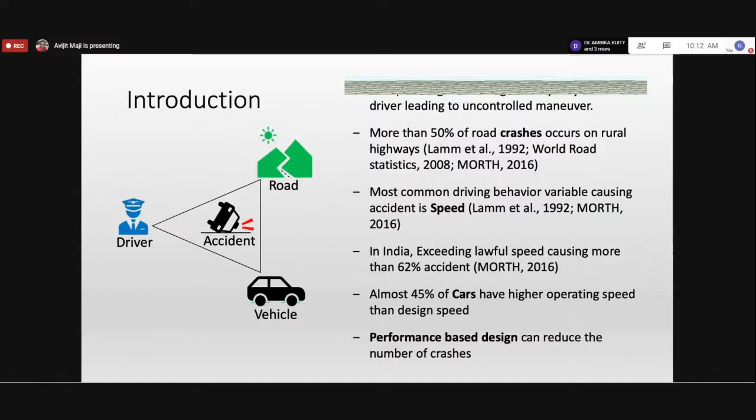Now, what do we mean by this product - what does it entail, what are the details? We are looking into the product, which is the roadway. The roadway has certain specifications, one of which is the design speed. Based on the design speed, we develop the product which has horizontal alignment and vertical alignment or vertical profile.

These two elements are developed based on the sight distances we want to design, and the sight distance is again considered from the design speed. As we look into this, there is a third element in the design, which is the cross sections.

When we are designing all these things and looking into safety and performance, we definitely need to understand the sight distance, and particularly, as I said, two-lane highways are critical. So one of the sight distances which is critical for two-lane highways is the overtaking sight distance.

In this presentation, we'll be focusing on that. So the main focus of this presentation is, first, the horizontal alignment - even though vertical alignment does affect safety, horizontal has more effect than vertical alignment, I'll come to those things as I present - and the other part is the overtaking sight distance we want to look into.

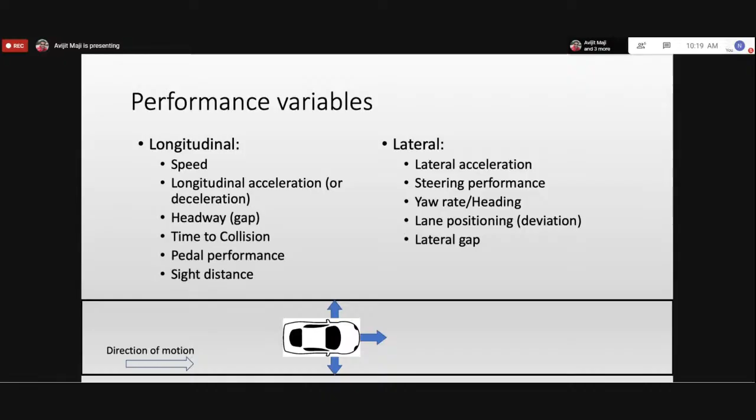Now, to collect these parameters, we need data. There are many ways of collecting it, and many of you are familiar with these various methods. One could be a speed radar gun, where someone stands beside the road and collects the speed of the approaching vehicle. In this method you can only collect the speed of the vehicle, which is one of the longitudinal performance parameters.

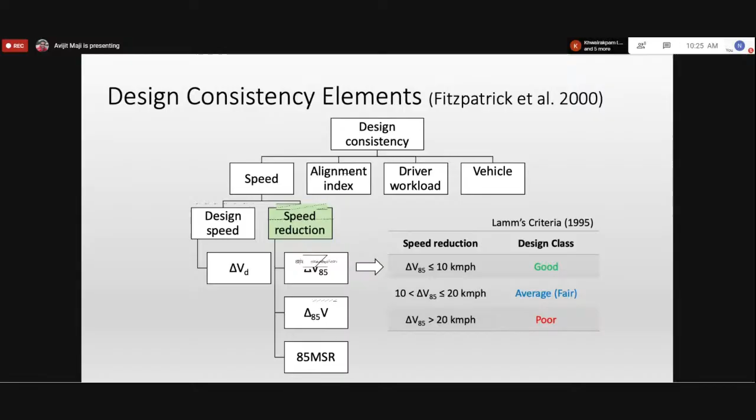In the first case, del V85, we have already fixed two locations, and we are just observing the 85th percentile speed at those two locations and deducting that. In our two-lane highway, the two critical locations are the preceding tangent length and the curve. We mainly check at the center of the curve and about 50 to 100 meters ahead of the curve in the tangent.

In the second case, instead of just taking the 85th percentile speed at both locations, we actually track the vehicle which passes through the first location in the tangent and the second location at the center of the curve. We look into the difference in speed for that particular vehicle, and check the 85th percentile for all the vehicles passing through.

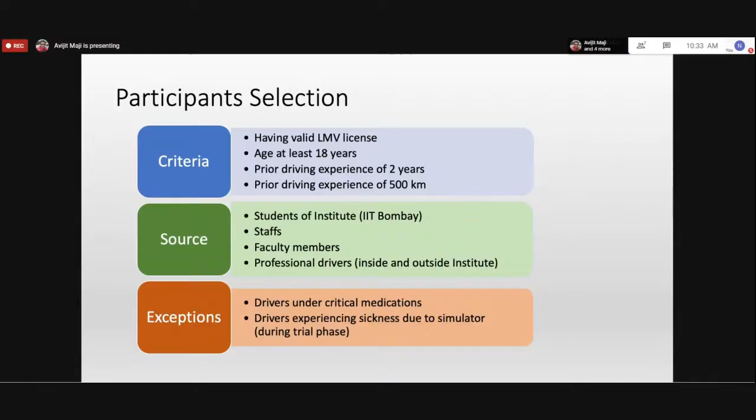And this study was conducted in the driving simulator. The driving simulator has its own drawback. There could be an issue of driving sickness. So we have to exclude them.

Now, before we start the experiment in the driving simulator, we need to have a pre-experiment session where we need to explain everything to the driver, collect certain demographic and experience data from the driver, understand their health condition, and then give them some time to get familiar with the simulator. And once all these things are done, then we get into the final test.

When we do the final test and collect the data in the driving simulator, we need to extract it. The driving simulator has the capability of collecting data at the rate of 120 hertz. If we have that amount of data, we need to apply a certain method or technique to use the data which we want. For our case, we kept it very simple. We just took the average of the speed and all the variables we are collecting over a 5-meter segment, so that we can reduce the number of data points in our analysis.

Once we collected all this data and tried to understand the performance measure, in this case the performance measure was the operating speed, particularly the reduction in the operating speed. In that reduction, we want to see the influence of the road geometry, which is represented by radius, preceding tangent length, curve length, gradient, super elevation, extra widening, and shoulder width.

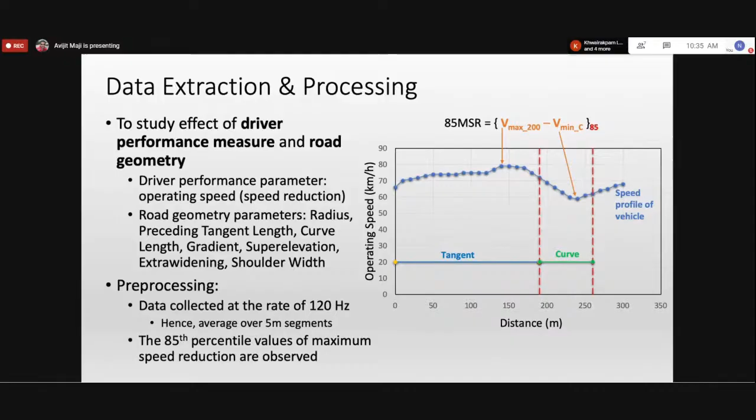As the radius increases and becomes infinite, which is a tangent, you would see a very comfortable, stable speed. But when the radius is reducing and coming to a very tight or sharp curve, you'll see that in the tangent the vehicle was traveling at a higher speed, and as they enter the curve, they have to reduce the speed. So that is what it is indicating.

Then the other parameter, PTL, which is the preceding tangent length, indicates that as the tangent length increases, the speed change is going to increase. If you have a longer tangent, people are comfortable, they will try to reach their desired speed, and followed by the curve, they need to reduce again. But if you have a shorter tangent, the driver might think another curve is coming, and they might not even reach the desired speed comfortably before they start reducing the speed for the upcoming curve.

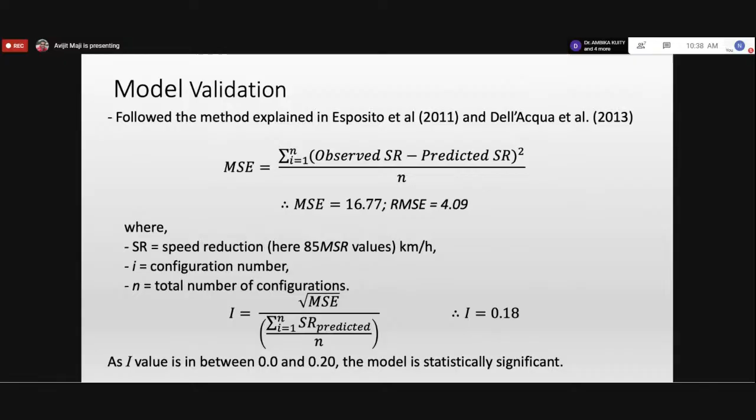Now, we had two parameters, and we need to see how sensitive they are. So we looked into the sensitivity of the parameters and found out the radius is sensitive compared to the preceding tangent length, particularly if it differs a lot from the mean value which we had considered in this case. So we need to be careful in the design when we are using a particular radius.

So further, what is the implication of this on safety? We looked into how we can actually use it. We looked into the various percentiles of the distribution of the speed reduction, and we categorized anything above 85% as poor design, and anything below 50% as good. With that, we set a limit of 20 km/h for good design, 20 to 35 for fair, and above 35 is poor. So if we look at the speed reduction in this range, this is how we can categorize our design.

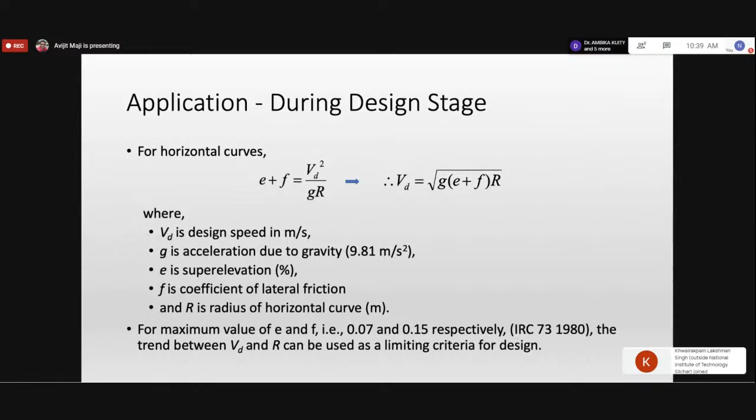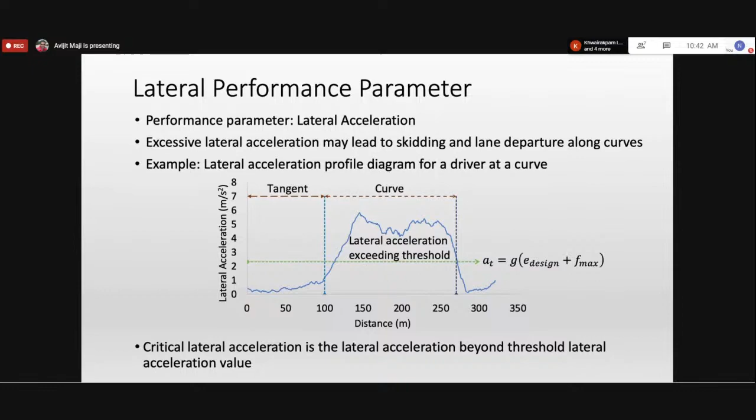So in this case, we are looking into the lateral acceleration which exceeds the limit value. When we look into this lateral acceleration, we see the amplitude changing a lot over the distance of the curve. So we need to understand how we can capture this. For this, we used a theory from solid mechanics. Basically, we use the moment of area about the y-axis to understand that.

When we tried to group them, we got three groups: RG1, RG2, and RG3, from the lateral acceleration values obtained from the test. Again, this experiment was conducted in the driving simulator because it is quite dangerous in certain cases. For example, the last row, shown in red, are the cases where the vehicle ran off the road or overturned. Overturning means there was an accident, and trying to observe this on a real roadway is dangerous and very difficult. So this type of experiment can be conducted in the driving simulator.

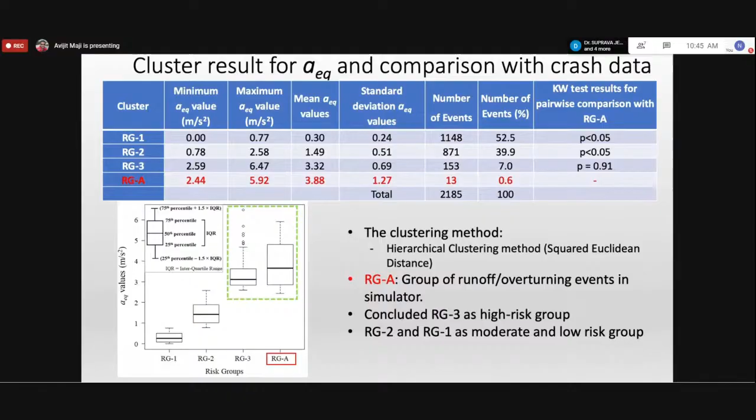So accordingly, we have named them. We named the RG3 group the high risk group, RG2 moderate risk, and RG1 low risk. Once we do this, we use the generalized linear mixed model to find the probability of run-off, getting off the roadway, side slip, or turning over.

When we looked into the probability and tried to develop a model, we got a model like this. In this model, we have grouped the high risk group versus the low risk group, which includes the moderate as well, so the low and moderate risk group.

In the other case, we try to model if we consider both high and moderate risk group and try to compare with the low risk group. So we got two different models considering how we assume or consider the data which we got.

So in the first case, when we are comparing the high risk group with the low and moderate risk group, we find the model which is on the left hand side, where we are seeing that the risk is going to increase as the radius is going to reduce. So if the radius is going to reduce, the curvature is going to increase, and as the curvature increases, it has a multiplication factor of 237.56, which means it is going to increase.

However, when we are looking into the gradient, as the gradient increases, we are seeing the high risk is going to reduce. And this is exactly the same when we are looking into the high and moderate risk group versus the low risk group. So it is giving us the sensible trend in the same way. Now, we have also looked into the mixed effect of the curvature and the gradient, so together also it has a positive correlation. So this is what the model looks like.

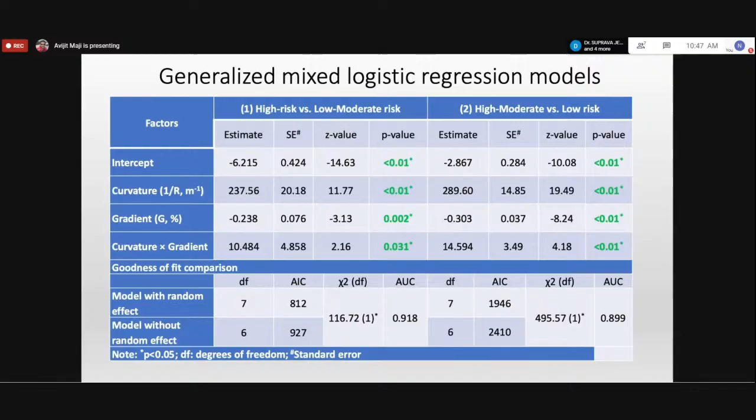If you want to present it in a graph, this is what it looks like. So the risk probability of high and moderate risk group versus the low risk group. So in this case, when we see the curvature which is on the x-axis and the probability of risk which is on the y-axis, you take any of the radius.

Suppose you take the 75-meter radius, and as you change the gradient, going from the positive gradient, which is 6%, towards the negative gradient, which is minus 6%, means you are going from the ascending gradient to descending gradient. As you change the gradient, the risk is increasing. So it is very clear that for a given radius, if you are going in a down gradient or the descending gradient, the risk is going to increase.

Likewise, if you want to change the radius from a particular one to another one, for example, if you consider the radius 75 and the 100, for the same gradient, you have to move towards the left along the line. So if you take the gradient 0, which is at the middle, the black line, if you try to move along the line, you can see for the same gradient, as the radius increases, the probability of risk reduces. So which explains, if you have a generous radius, the risk is going to reduce, and this is going to help us to quantify that, assess that, and this is the performance which we can use.

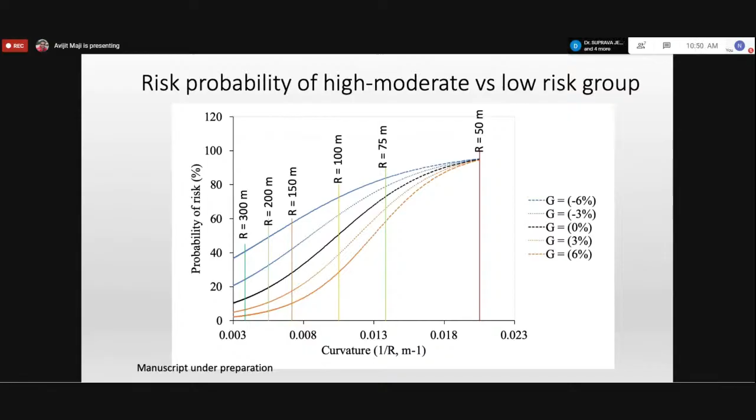Now, this was for the grouping based on the risk. We further looked into the geometric grouping. So what is exactly happening in this risk group? The geometric parameters which we looked into are two: one is the radius and another is the gradient. That is what we saw in the previous two graphs. And the third one which we looked into is the preceding tangent length, because that was also coming up in our model. And all these things are designed based on the design speed. That's the fourth parameter which we looked into based on the geometric design variables.

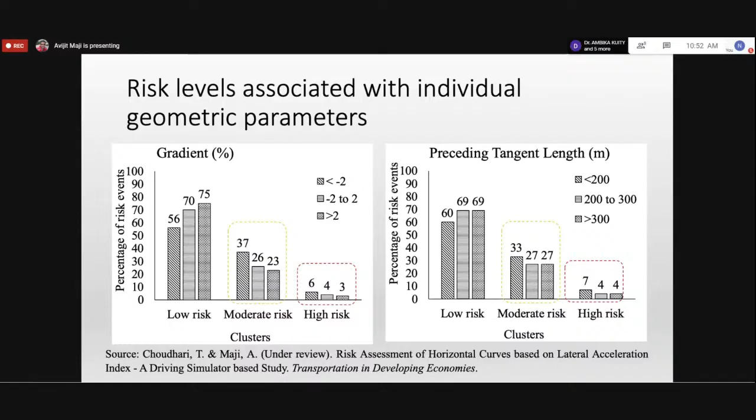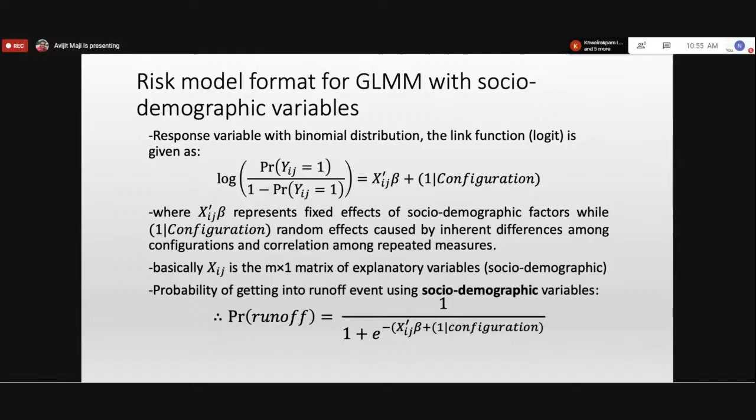So we wanted to model the same risk groups based on the socio-demographic factors: high risk versus low and moderate risk, and high and moderate risk versus low risk. What we are seeing is that age has a positive effect, and experience also has a positive effect. Age has a positive effect in the case of mid-age; only for mid-age do we see the positive effect. Experience, if it is mid-experience, also has a positive effect. It will be understood better when I show you a certain plot.

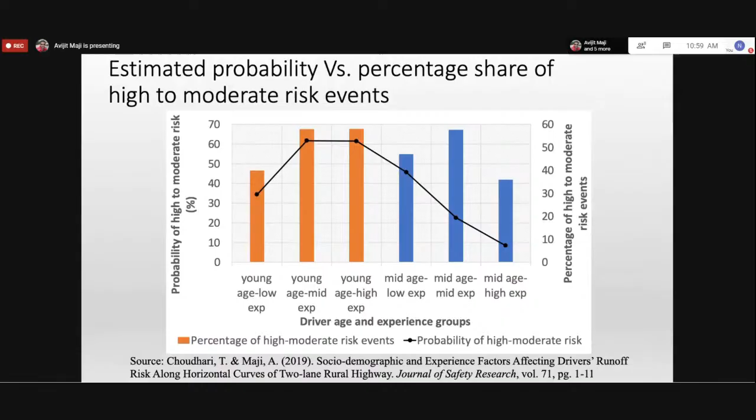Now, another component we indicated at the beginning is the sight distance. I'll quickly move on to sight distance now. One of the sight distances which is quite critical in the two-lane highway is the overtaking sight distance. One component is we need to know what is the overtaking distance, how much distance the vehicle is traveling to overtake another vehicle.

If we look into the literature, there are various overtaking strategies, like accelerative overtaking, flying overtaking, piggybacking overtaking, 2+ overtaking. Among all these, you will find that accelerative overtaking is critical. That is what is considered in the overtaking sight distance.

Accelerative overtaking is where a fast-moving vehicle first follows a slow-moving vehicle, and when opportunity arrives, the fast-moving vehicle changes lane, accelerates, and then completes the overtaking of the slow-moving vehicle and returns back to the lane. This is called accelerative overtaking.

The other types of overtaking are different, where they don't actually change the speed, and many other things are happening. For brevity, I'm not going to get into that, but you can look into the paper we are working on, which is going to be published soon, or any other paper you can refer to for that.

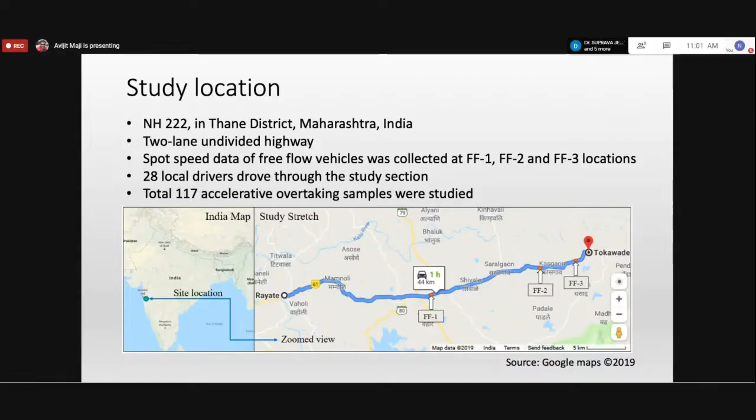Now, when we looked into the speed profile of the various vehicle types, we found that the passenger car has the highest speed among all the other vehicles plying on that roadway. This is the reason we chose passenger car as the overtaking vehicle, and all others, including another slow-moving passenger car, as the overtaken vehicle.

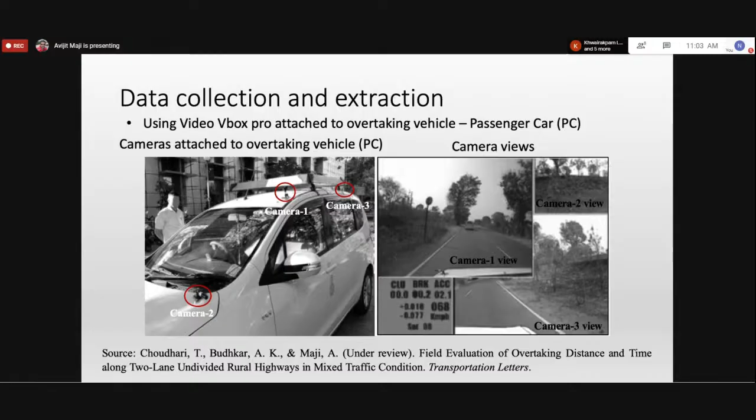Camera 3 is on the back side of the vehicle, and it is only looking into the rear of the vehicle, just to see when the overtaking is completed, how the overtaken vehicle looks like or where it is positioned and so forth.

So we use certain image analysis processes to get various values for the relative distance between our overtaking vehicle and the overtaken vehicle. We also looked into the position of the overtaking vehicle with respect to the road edge, so we know when the overtaking vehicle is crossing the lane.

All these things are done based on the camera calibration, and before we actually go out in the field, we do the calibration of the camera and then extract the data, as it's a semi-manual process which we use. Currently this work is under review and we are hoping to get it published soon.

The variables which we looked into were the overtaking distance and overtaking time, which are the dependent variables. We studied those variables based on the overtaking vehicle speed, overtaken vehicle speed, average speed difference, longitudinal gap between the two vehicles, speed of overtaking vehicle at start and end, and also the maximum speed.

So when we developed the model, we found that the overtaking distance is depending on the difference in speed of the overtaking and overtaken vehicle, that is the del VAB, the average speed of overtaken and overtaking vehicle.

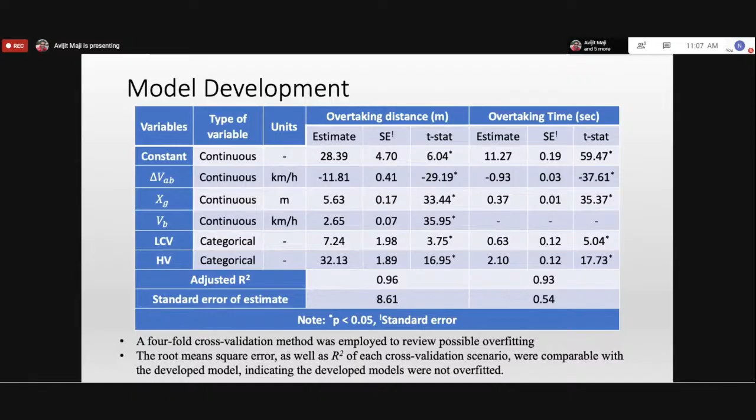Now this is what it is. If we understand this, we need to compare it with our design practice. So looking into the design practice, the design overtaking distance which is there in the IRC, we also try to compare with AASHTO, two different AASHTO guidelines, 2001 and 2011, because there is a significant change in the AASHTO guideline between 2001 and 2011.

When we compare, we can find out the solid line, which we obtained from our model, our study, is to some extent very close to the AASHTO guidelines, even for 2001 and 2011, even though we see some difference. But it is quite different from the IRC, and particularly at higher speed, we are seeing that the overtaking distance is quite less than the IRC prescribed distance. This indicates that in many places we might be saying overtaking is not safe, even though the driver can easily overtake. This actually indicates that over time, the driver will lose trust in what we are saying on the roadway.

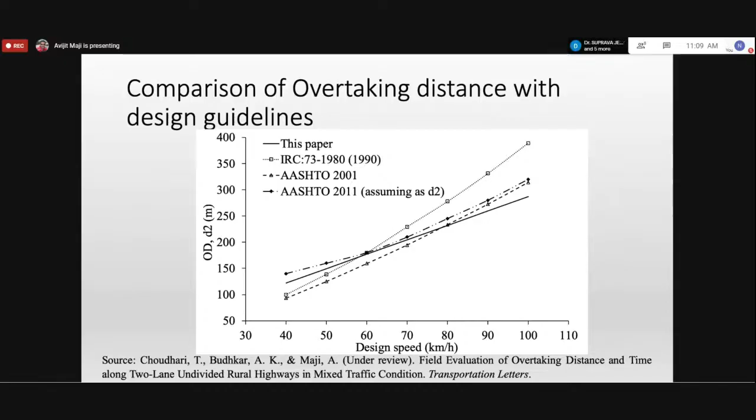So the same thing, we try to compare. This is the overtaking distance only. We try to compare with the overtaking sight distance. So as we look into the sight distance, again we see that what the IRC is providing is comparatively high, particularly in case of higher design speed. And IRC is actually saying low in case of lower design speed. So in both cases, there could be a trust issue on the design which we are providing to our road users or the designer.

Now, when we compare to AASHTO 2001, basically we see that AASHTO 2001 was quite high compared to our design, and possibly this is the reason why AASHTO thought of revising the design guideline to make it more oriented towards the performance of the driver. That's why they came up with AASHTO 2011 and other models, indicating that the overtaking sight distance is quite less than the 2001 guideline.

Now we cannot directly compare the overtaking sight distance of AASHTO 2001 with our study. One of the reasons is that the vehicles in the US are quite powerful compared to our case, and also many times they have tractors on these rural roads that they need to overtake, and that is where the overtaking sight distances required for overtaking a tractor come out quite less.

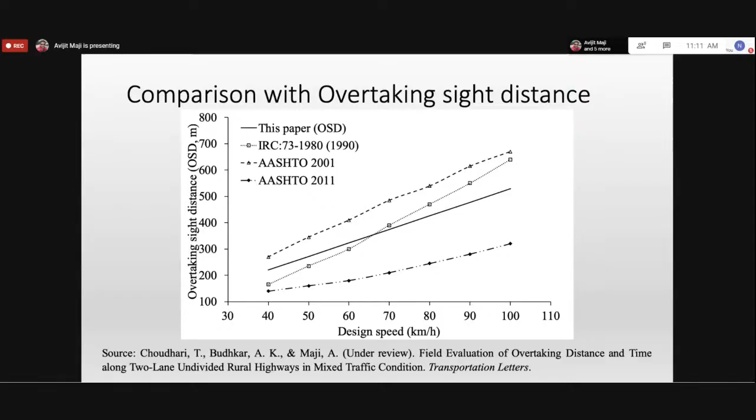So these tools we are discussing can be used for evaluating the safety of our existing design. We can also use lateral acceleration for the performance as well. We are also seeing that radius and gradient together have an impact. We are seeing that age and experience also have an impact. So these are going to be radius and gradient when it has an impact, so in the design we have to consider these two things together.

If you recall, in the design we have grade compensation. So this is what is indicating about the grade compensation related to when you see the combined effect. We haven't gotten into the grade compensation part of it, but it can easily be incorporated at that level. Now, age and experience does matter in the driver training program and other details, and it can be considered in that way.

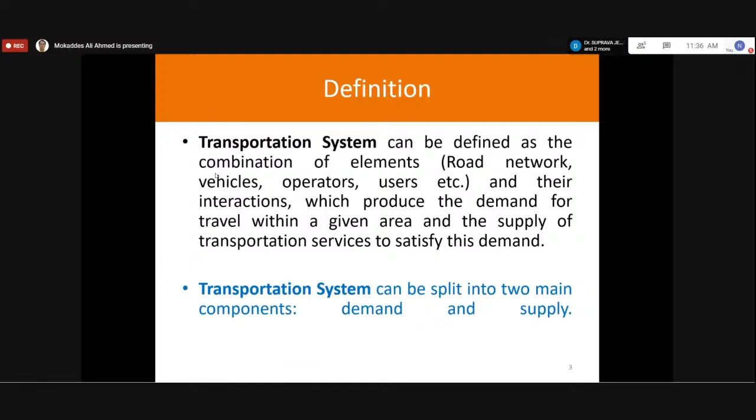Going back to planning, it is the process of defining the future policies, goals, investment, and design to prepare for the future need to move people and goods from origin to destination. It deals with the development of a comprehensive plan for the construction and operation of transportation facilities.

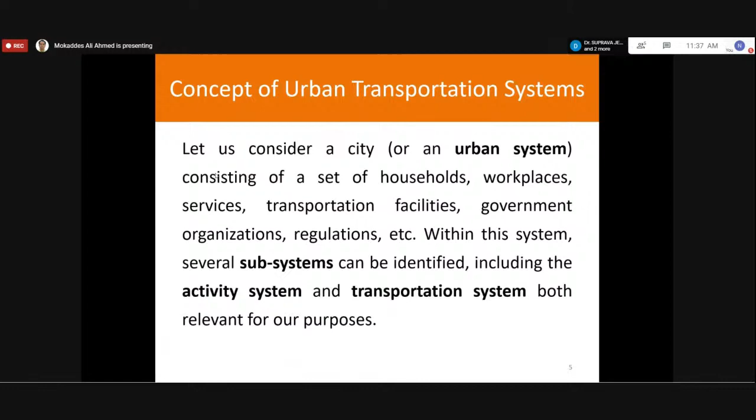Let us first see the transportation demand part. I will discuss again how to evaluate this demand. It is basically the demand of the user, the spatial distribution of the demand, and finally the mode choice and the flow in the network, that is the amount of traffic in various road networks. On the supply part, what is the total vehicle you are supplying? What is the amount of road network we are supplying? What is their capacity?

What is the level of service of the vehicles? What is the level of service of the road network? What level of congestion, etc. So depending on the demand of the urban area and the supply of the transportation system, these two again will depend on the activities.

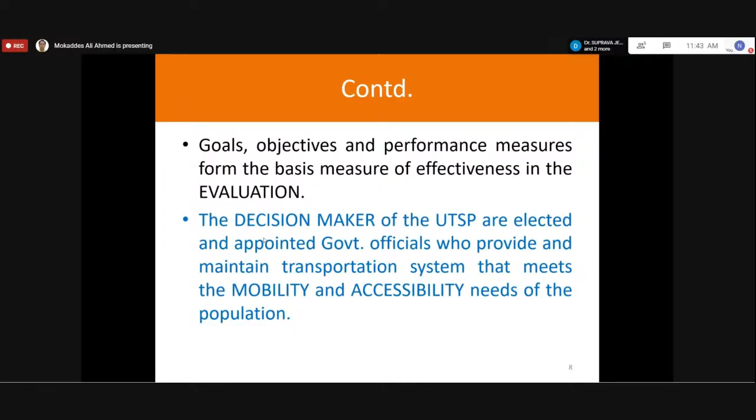Under transportation planning, the different practices such as urban development, urban transportation policy, legislation, funding bodies, project management, etc., all come together. Finally, the aim of transportation planning is to provide a sustainable transportation system for the society.

These may be the field engineers, the transportation planner, the traffic engineer, or even the traffic police to control the system. And finally, the communication with the decision maker, the public, and the media. That is, whatever decision is being taken, how that decision is transmitted to the users of the system.

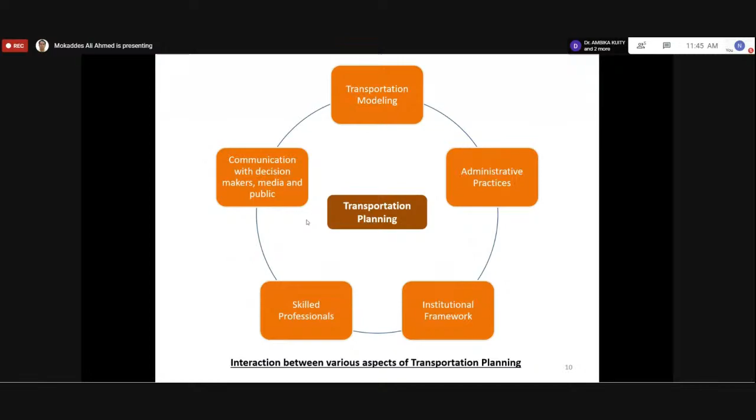So everything needs to be put under the same umbrella, and all the people involved in transportation planning should work together to make the system a perfect one. During the planning process, these are the various types of plans we have. One is the comprehensive plan, which may be of 25 to 30 years duration. The master plan, which we have for all our urban areas, is normally for 20 years. Then the 5-year implementation plan.

The way the Government of India's 20-year plan is divided into 5 years, similarly every plan should be divided, and the final implementation plan may be even 1 year. That we also call the execution plan.

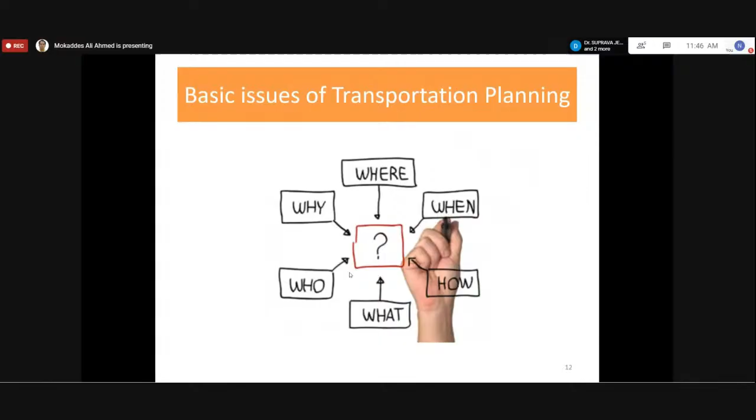What are the basic issues then? That is what to plan, where to plan, when to plan, how, who are the people involved, and why to plan. That is, what is our goal, what is the vision, what is the mission, everything we need to consider. So let us go further. To understand these basic questions, let us raise some questions ourselves.

Where we are: it is the question with respect to our existing urban area for which we are thinking of the transportation planning. It means to evaluate the existing condition, such as the trend, the condition related to the population, the transportation condition of the urban area, etc. That is, we have to know the system first.

Then where do we want to go? That is, what is our goal? Say, for example, on a scale of 10, if 10 represents 100% satisfaction for the user and 0 means the users are very unsatisfied, then up to which level, 7 or 8, we want to reach through our planning, that we have to decide. In NBA accreditation, we call it the satisfaction level. What is the satisfaction level? That we have to decide. We can do that through the major issues, the obstacles in future, and the opportunities in future.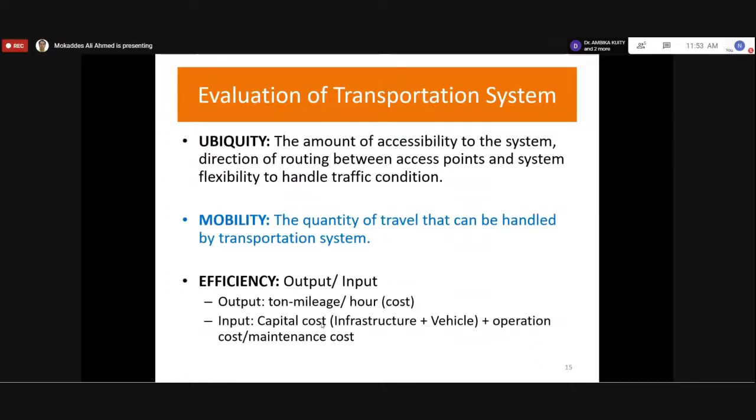With this general background, let us go to some of the history of the transportation system, just to give a flavor of what we are talking about. Basically, the road started about 3,500 BC. Sorry.

I'm extremely sorry.

So after the development of agriculture, if you go back to the history, the residence became fixed and the field became fixed. Then there was a to and fro movement between the residence and the field. So from here, the roadway starts. Before that, the nomad people were traveling in an open traverse. So there was no concept of road network prior to the development of agriculture and settlement.

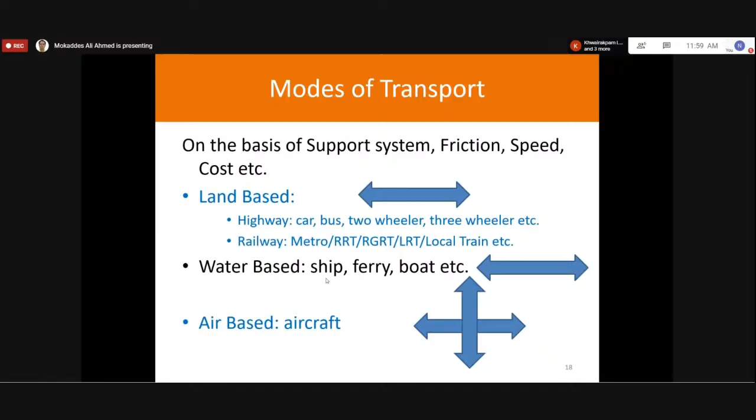Similar is the case of water bodies, the ship, ferry, etc. The water is there to support our vehicle. We have to just move in the longitudinal direction, but the speed is not as desired in case of highway and railway, and that is why water-based transportation is one of the cheapest modes of transportation. So this support system and the cost involved, these two criteria are very important to understand if you want to understand the mode of transport.

Okay, then I am giving you another concept, the total urban transportation systems, with respect to schedule and the road. At the top of this block diagram you will see the time or the schedule. This side is the space or route. And then the time is also segregated into two parts. This part is time fixed, and this part is time variable. That is, schedule is variable.

It is something like this: the movement of the train is already declared. Your aircraft movement, the flight schedule, is already declared. Those are nothing but fixed. Whereas when you want to go out with your personalized vehicle, say your two-wheeler or personal car, you can go out at any time. So that is nothing but the variable time schedule.

On the other hand, this is space or route. Again, for some types of transportation modes, you will see that the routes are fixed. Even for our city buses, the routes are fixed. The city buses cannot deviate out of their route. The train line and the flight route are fixed.

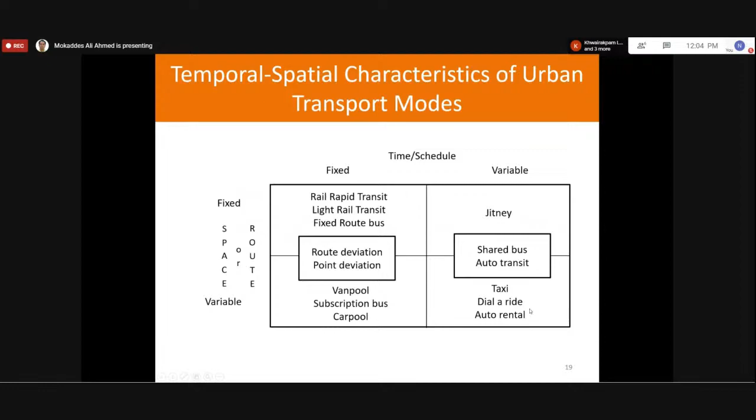So if we divide the total urban transportation system into private, paratransit, and transit, we can study some of their characteristics. That is the ownership. In case of private, we need to own the vehicle. But in case of paratransit and transit, no need to own the vehicle. As for parking, in case of private mode, we need parking, maybe in the form of a garage attached to our house. But in case of transit and paratransit vehicles, we do not need to park a vehicle of our own.

Door-to-door service: you are starting from your door, origin to destination, basically. In case of private, it is possible. In case of paratransit, if you hire the vehicle, say a taxi or auto rickshaw, then it is possible. But if you use the shared mode paratransit vehicle, then it is almost like the transit.

Then what is the user cost involved? Maybe in terms of fare or the operating cost. In case of private, the operating cost and capital cost of the vehicle have to be borne by the owner. But in case of paratransit and transit, we only have to pay the negotiated or predefined amount of fare.

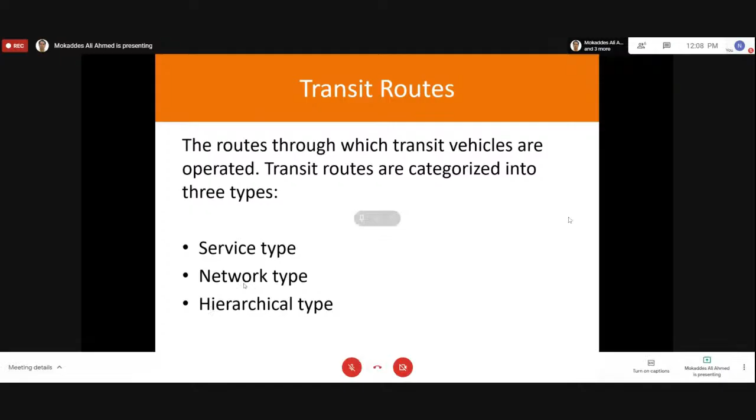The feeder routes, you can understand, go from the urban area to the airport, urban area or urban CBD to the railway station, CBD to the ISBT bus center, etc. Those routes we can say to be the feeder routes to the system of regional transportation planning.

The fixed route will depend on the transit system we are considering. Say, if you are considering bus, then a particular system of road network we can visualize. If you consider the LRT or the regional train or the local train, then another type of railway network we can imagine. So these are the various types of road network based on the service type.

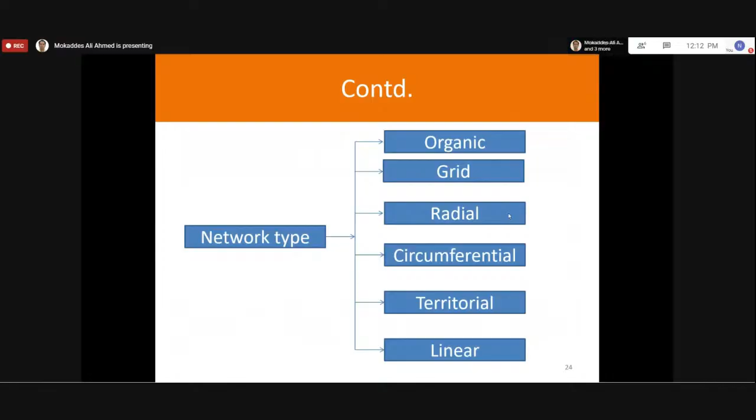The radial road network and radial and ring combined - whatever we have in Delhi. Delhi is nothing but the radial and ring network combination. So like this, we have several types of road networks, each with advantages and disadvantages. The best planned one is the grid pattern, and the worst planned is the organic road network.

In terms of hierarchy, overall we can consider the national highway, the expressway, or the Mahasarak. Other than this, four other categories are nothing but the urban road network - that is called the arterial road, sub-arterial road, collector street, and the local street.

Where the width is very less and the speed of the vehicle is very less, large size vehicles cannot operate in the local street, whereas on the arterial road, vehicles move at higher speed and the number of stoppages is very less, whereas on the local street we can stop anywhere. So, in terms of accessibility and mobility, mobility increases on the arterial roads, and land accessibility is more on the local roads.

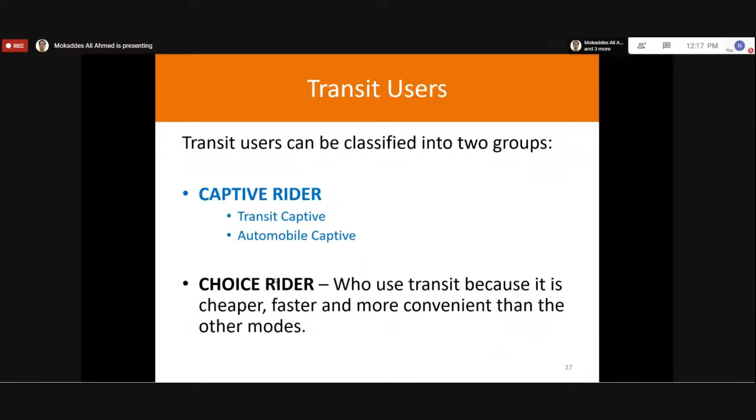So transit captive is the bottom class of our society in terms of economic class, and automobile captive is the top category of citizen in terms of economics. In between is our choice rider, the middle income group of our society. During off-peak, they will use transit, but as soon as they are going for marketing, they will use a private mode or hired taxi or hired auto rickshaw. That is called the choice rider.

In terms of economic class, if we divide our entire user group, we can divide into four categories. One is called real have-nots at the bottom of our society. This is the economically weaker section of society, which we talked about as the transit captive group. Another group is real haves. They have their own automobile. This group is nothing but the automobile captive. These two are the captive groups I described in the previous slide.

So what are we interested in? Our basic interest is to reduce this group of people and transfer them to the transit user group. Then the transportation problem will be resolved. But the problem is the automobile captive group of people, we cannot transfer to the transit captive. It's not possible, they will not use it. The transit group of people is already there with us, that is the transit user.

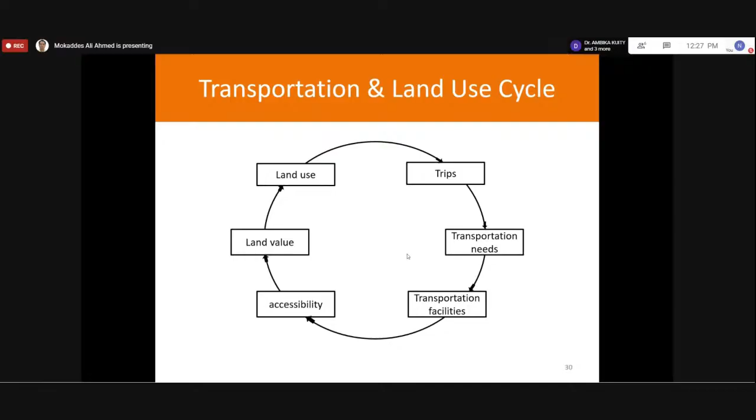So we need to understand this land use and transportation relationship very clearly to estimate the demand or the transportation need of the people. This is the thing about sequential demand analysis - the first phase is trip generation, the second phase of modeling is trip distribution, mode choice, and traffic assignment. What is this?

Say if the urban area is divided into several sectors or zones - for example our ward, the urban area as per the municipality has already been divided into various zones in terms of the ward. Let us consider ward boundary as our zone, or each ward as one zone. So what is the total population of that zone or ward? That determines how much trip is being generated from that ward, a particular ward. So that is nothing but trip generation.

This is related to the decision to travel. So that is nothing but the trip generation: how much trip is generated? Say from a particular ward, say ward number 10, 100 trips are generated. Now if the urban area is consisting of say 20 wards, then from zone 10, or ward 10, from where 100 trips are generated, those 100 trips are going to the other 20 wards. So how much of this 100 is going to each of those wards? That is nothing but the trip distribution model.

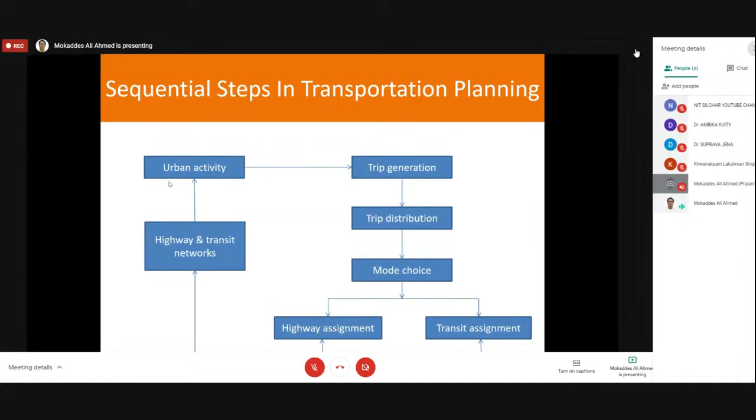So if urban activity is decentralized, say the market is somewhere, industry is somewhere, residence is somewhere, the park and entertainment center is somewhere, the regional transportation node is somewhere, and they are say 10 kilometers, 5 kilometers apart, then more trips will be generated. The travel demand will be more. And if we can put every activity in a single place, the demand for travel will be less. But the problem is, if you put all the activity of the urban area in a single location, there will be over density of the activity. The footprint will be more. All the people will come to avail those facilities and there will not be sufficient road network, water supply, or infrastructure facilities. Everything will be in scarcity. So we cannot do that.

So finally, urban activity has to be well settled or well located so that neither over demand is happening, nor over footprint is accumulating in a single place, nor the travel demand is unnecessarily increasing. We have to balance this. So because of the location and allocation of the urban activity in the urban area, the trips will be generated. And as the trips are generated, they need to be distributed, then the mode choice, whatever I have described in the previous slide. And finally, we have to put the entire trips generated either on the transit network or the highway. This means either we load the trips onto transit, or we request the private users to use the highway. That is nothing but the highway or transit loading.

So finally, depending on this, the urban activity will again be allocated or dislocated. Many times we find that urban activity is being dislocated. Nowadays, in most Indian cities, large size malls and similar recreational activities are being put in the central area of the urban center. And because of that, more and more people are coming to these large size shopping centers.

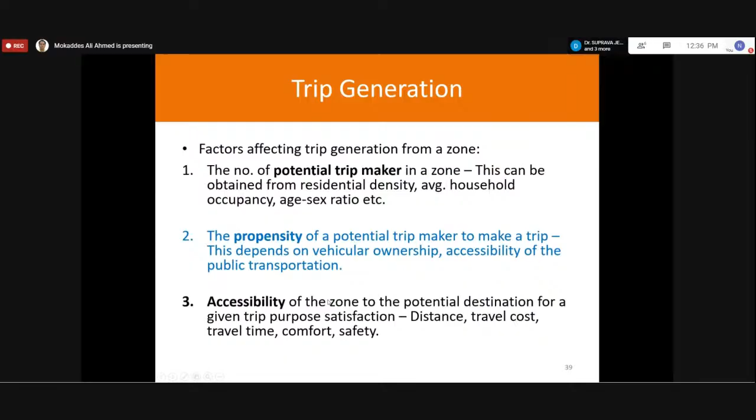Then the first model is trip generation, which depends on the number of potential trip makers, the propensity of the trip maker, and the accessibility of the attraction zone. There are 2 types of trip generation model: the cross classification and regression model. I have to skip many things because of this time constraint.

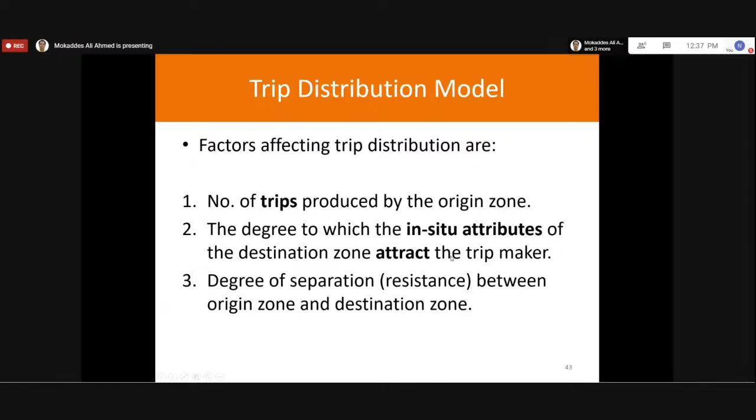Again, the trip distribution model depends on the number of trips generated in the origin zone, the attraction activity of the destination zone, and the distance between them. So there are gravity model, intervening opportunity model, choice model, and entropy model for the trip distribution.

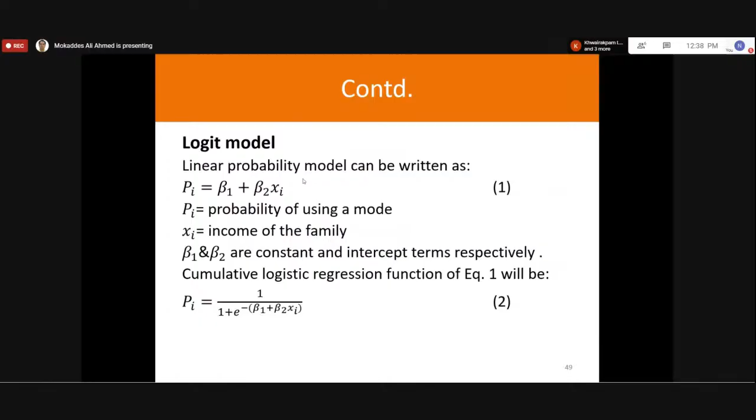Okay, I'm coming to the last slide. Here I have tried to give some idea of the research direction, from whatever you have listened to since yesterday. One very important thing is automated data collection. Research should be in automated data collection. One example is what Vinod Vasudevan sir told yesterday about the instrumented vehicle. This is nothing but a sensor-based automated data collection method.

Even today, Maji sir has described the driving simulator. Such types of sensor-based data collection methods we have to devise. And after collecting such huge data, where this data is to be stored, we need to think. And that huge amount of data, which is difficult to operate, how to filter it, which part is useful for us, and what type of analysis is to be performed. This is nothing but big data analysis.

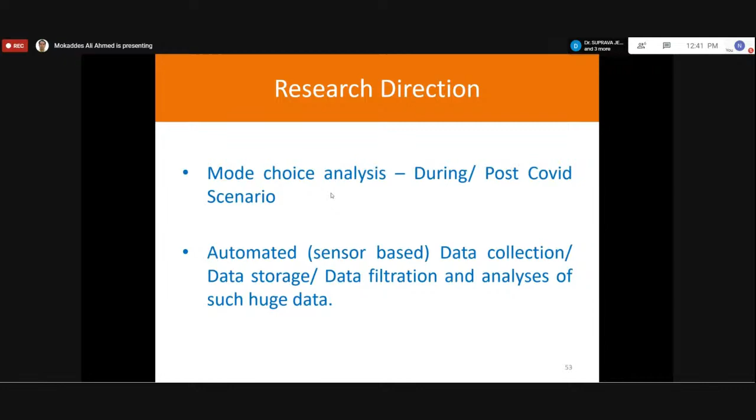Is our road system capable of holding that additional loading of vehicles? Or are we going to be over-congested in the near future? So what is going to happen? That is nothing but mode choice analysis; we may think seriously regarding the post-COVID scenario during mode choice analysis. So thank you very much.

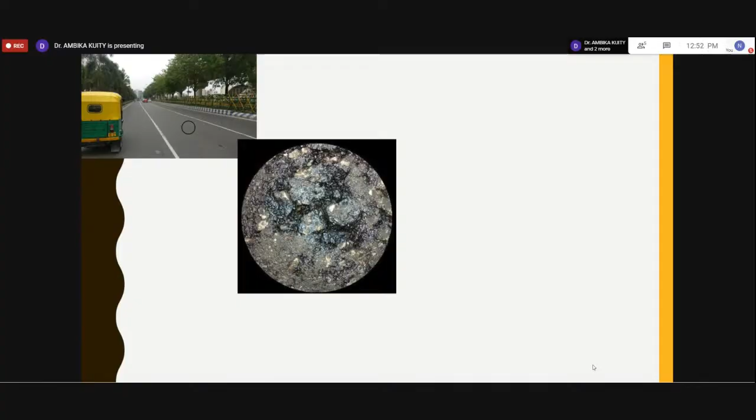So here we can see that lots of aggregates are coated with the bitumen, but we are unable to identify what aggregates are present within that sample. If we go for the cut section, we might observe that lots of different sizes of aggregates are there, and it's composed of almost 95% aggregates, and the remaining 5% is asphalt binder. Within that mix, some portions are not clearly visible. That portion is called mastic.

So there, as an alternative, this is the age of different imaging equipment we can use to explore that area, those internal structures. What we would like to say is how those internal structures are able to give you mechanical strength, how it's going to improve. What we are observing is that some portions we are not able to see by using the simple regular day camera. That camera is not able to observe that portion.

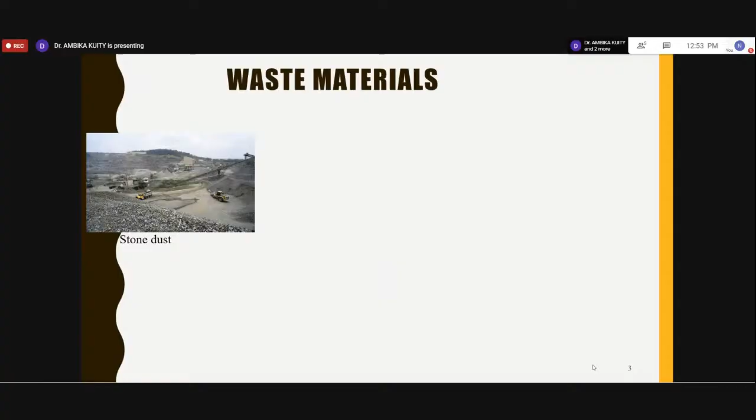So we need some advanced equipment to observe what is going on inside, how those particles are distributed in the mastic. Before going to that portion, we'd like to say what the waste materials are. That is a burning topic nowadays. Several researchers have already explored lots of waste materials in the asphalt mix. So here I am highlighting a few of the materials.

So here these are the conventional materials, whereas these are the unconventional materials. For the conventional materials we generally use the weight proportioning scheme, but that will create problems when we use unconventional materials, because the materials we are going to use are not of the same density or specific gravity.

So for example, this is the rice husk ash. If you burn it, obviously the specific gravity or density of that rice husk ash will be very low. But in construction and demolition waste, it may be high, or for litter, if you are going to use it, it is very minimal. So these unconventional materials we may use as a whole gradation, part of the coarse material, part of the fine aggregates, or part of the filler.

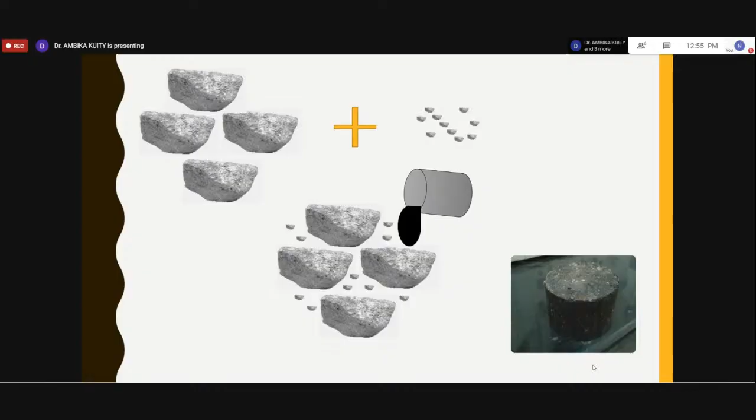So can I make the asphalt mix by using a single size of aggregate? The answer is no. That's why we have to use different sizes of aggregate, and if we mix them, it will give you a mixture. But from where will we get the adhesive bond? Therefore we have to use the asphalt binder, and ultimately we get this kind of product, which is very stable and very significant in giving us a smooth ride on the road.

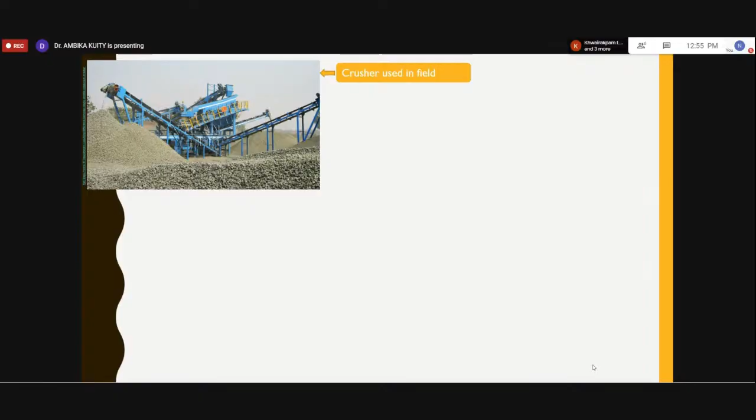So before going directly to the filler, we would like to use the term aggregate gradation. And what is aggregate gradation? If we see in the field how the crushers are used, we get large size aggregates from the hills, and then we crush those aggregates into different sizes and shapes. And in the laboratory we use sieve sizes. Different sieve sizes are present there.

Using those sieves, we consider above 4.75 millimeter as coarse aggregate, whereas below that we consider as fine aggregate. And in general, we consider below 75 micron as filler. And we get the whole aggregate gradation, like this image is presenting, as the cumulative percentage. And while using these types of aggregates, we get different types of gradation.

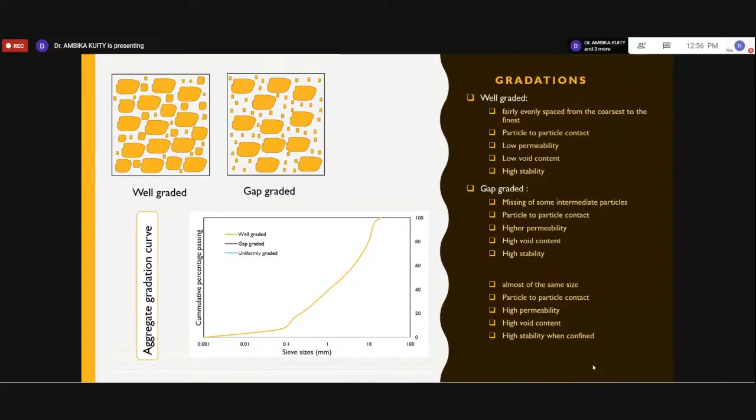One is called a well-graded aggregate, where all sizes of aggregates are there, starting from the coarse to the finest. And the gap graded, by name itself, suggests that certain sizes of aggregates are not present in that gap graded aggregate gradation.

And another is the uniformly graded aggregates, where only certain sizes of aggregates are present. And these will give you different mechanical properties when we change these different types of aggregate gradations. So aggregate gradation has a very crucial role to play in terms of its mechanical properties, to enhance its stability, enhance its workability in those aspects.

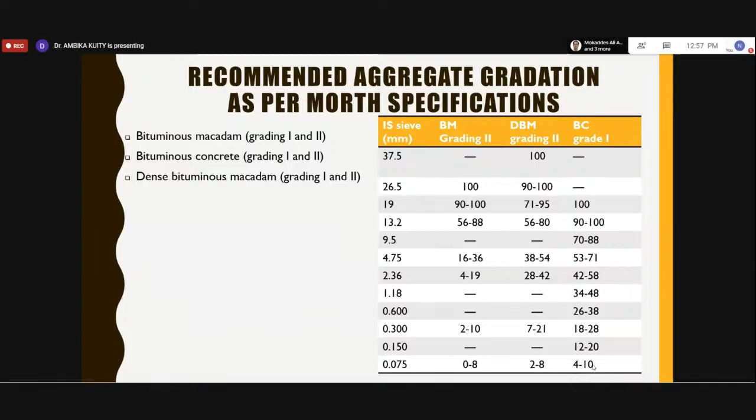So this is huge. We cannot capture the whole aggregate gradation through a single imaging equipment. Coming to the smaller size fractions, some portions of aggregates are in contact, some are in suspended conditions. The contact particles are in contact, but how will they stay together? The suspended particles help to bind the aggregates together or hold them in the same position.

So now coming directly to the fillers, how they work. If we mix the filler with the bitumen, then it may act as a modifier, or it may be the integral component of a mastic, and obviously it will help to pack the voids created by the skeleton of the coarse aggregate and the finer aggregate. Wherever there is a void, it may be filled by the filler along with the asphalt binder.

But here in the bituminous mix, whatever we can observe, filler particles which may be considered circular in nature can act as ball bearing particles. So when you compact the sample, it will orient the aggregates and they will go into a stable position. So this can be the filler's role.

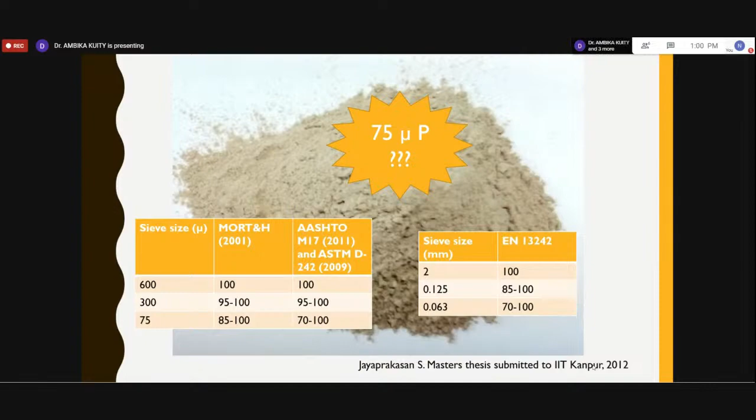Whereas the European code has considered less than 2 millimeter, a huge range from 2 millimeter to below 63 micron, to come under the definition of filler. But in general, what we consider is the material passing below 75 micron. So here is the same question: if we are going to use different materials, the big issue is density.

If we are going to use rice husk ash with the weight proportioning scheme, that will give you a huge quantity. If you consider 7% of stone dust and 7% of rice husk ash, then the quantity of rice husk ash will be huge. If you mix it within the standard asphalt binder content, with other components kept fixed, you cannot even prepare the sample, because the rice husk ash may have greater absorption of the asphalt binder. So it will create some problems.

So this is our existing approach: when we are using proportions by weight and the volumes are different, we get these kinds of problems. It will absorb more binder, or it will give less stability or stiffness within the mixes, and obviously it will hinder the mechanical performance of these asphalt mixes.

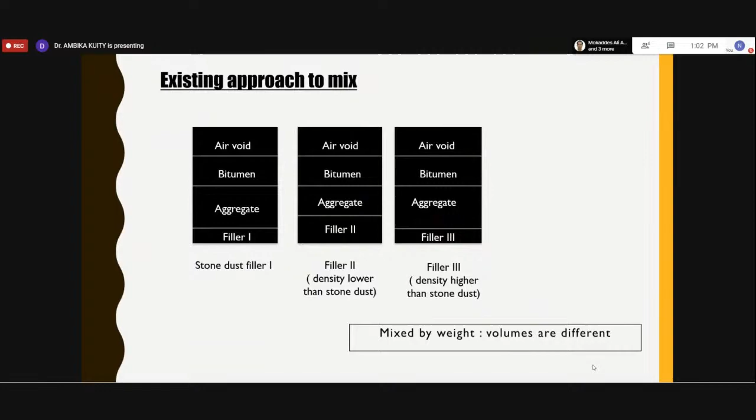So the next approach we proposed is the volume proportioning approach. The same volume we get from the stone dust, the conventional filler, we replaced with fillers which have low density and high density, and we prepared the samples.

But obviously that is also going to give different results based on different quantity of the filler particles. This is the volume proportioning. Then again, this question arises: which one is the best approach, the weight proportioning scheme or the volume proportioning scheme?

So here, with the advantage of this imaging equipment, what is the crucial role that it can play? It has a role to play in the internal arrangement of the particles. So we can move forward for the microscopic study. Through the advanced microscope, we can look at how these filler particles, of different sizes and shapes, and different characteristics, can be observed. So with the help of this advanced imaging equipment, we can explore the area of how we can quantify that optimum amount of the filler.

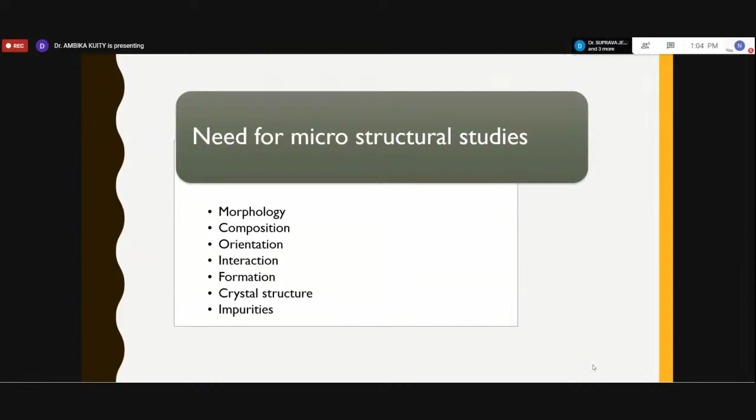So here are the basic needs for why we would like to see microstructural studies. Through these microstructural studies, we can explore the morphology, the composition, and the orientation of the particles within the sample. If there is an interaction, any crystal structure formed, we can see how different kinds of formation there are. If there are any impurities while preparing the samples, all these things will be clear under the microscope. So we would like to explore whether we can get some advantage from this advanced imaging equipment. Here we have used the scanning electron microscope, and now the basic thing is how it works.

If we hit the surface with the primary beam of electrons, and it penetrates only a few nanometers or microns, then it refers to secondary electrons. But if it hits something more, around 1 micron in depth, then it may scatter as backscattered electrons. Otherwise, it may transmit different kinds of elastic electrons. So lots of electrons are generated through the hitting of electrons in the specimen. So lots of different types of electrons we can gather, and different detectors should be available with that instrument to attract those electrons, and we will get the image as a raster image.

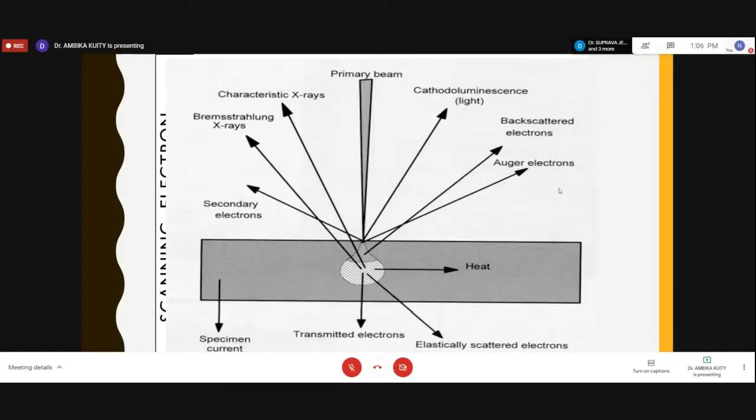So we can see those images, the sample preparation, that image. Considering the image we are getting from that SEM, sample preparation is a very crucial stage. I must say that for powder materials, what we are going to use as filler, if it is in powder form, it is not going to create any problem, and can go directly under the SEM, because this is a high vacuum chamber.

So obviously we have to keep in mind that the particles should not go within the vacuum, as it will damage the detector. So we put both-side tape on the stud, and then put the samples over that, blow off excessive material, and only then can we load the sample within the chamber. But before that, we have to remember that these particles are really non-conductive materials, so to make them conductive, we need a sputtering unit. There we may use gold coating or platinum coating to make it conductive. After this sputtering unit, the coating chamber pressure should be 4 to 6 Pascal, and then we load the sample, or the coated sample, into this loading chamber.

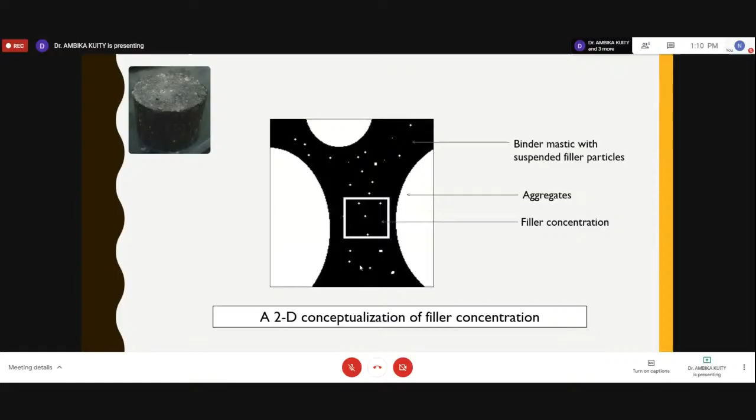So we had to get the sample from the asphalt mix sample itself. How can we get that sample? First, this is a 2D conceptualization of the filler concentration - these are the larger aggregates, and we might observe this as the river of bitumen, where these filler particles are embedded. It moves within, floated within this binder river, or river of bitumen, and it moves through all the voids it will fill.

The general methods to prepare the specimen: first we prepare the Marshall sample. Then we cut the sample, and since the cut sample has a very rough surface, we go for grinding, and after that, to get the reflective nature of the surface, we go for the polishing stage. After that, under the scanning electron microscope, we observe how these filler particles are distributed.

Here is the cutting method - we use a diamond cutter to cut the sample into smaller pieces. These samples may vary, but the height should obviously be the main constraint of the SEM. While doing the testing and taking images, the height should be maintained - it should be less than 5 millimeters. And the size, while cutting the sample, we should maintain that height every time.

After cutting the sample, we have to grind it into a standard size - that is 5 millimeter height, 5 millimeter width, and 1 millimeter length. So these are very tiny sizes of asphalt mix samples we have to prepare, because there is a sample loading constraint.

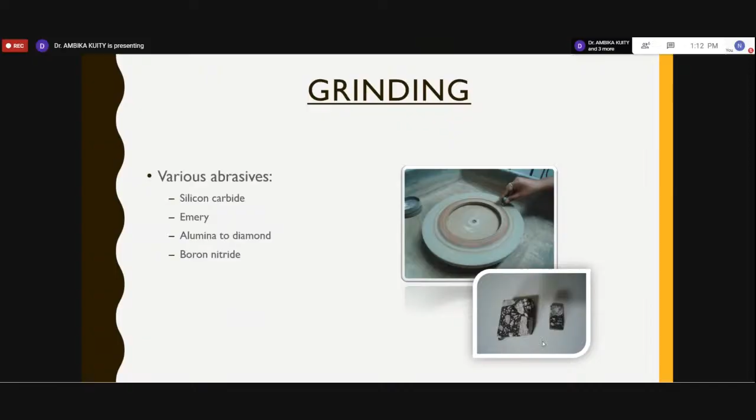We can use different types of abrasive - generally we use emery powder of 80 micron size for grinding purposes. This schematic diagram shows how the material is ground, giving us a smooth surface. Here is the huge rough surface after cutting, and then while grinding with this machine, we get back that surface with a smooth finish.

After that we have to do the polishing. Against the rotating flat disc, we use silicon carbide powder on the polishing cloths, and then it will give you the final sample looking like this. The size is very small, and this is what you use for capturing SEM images.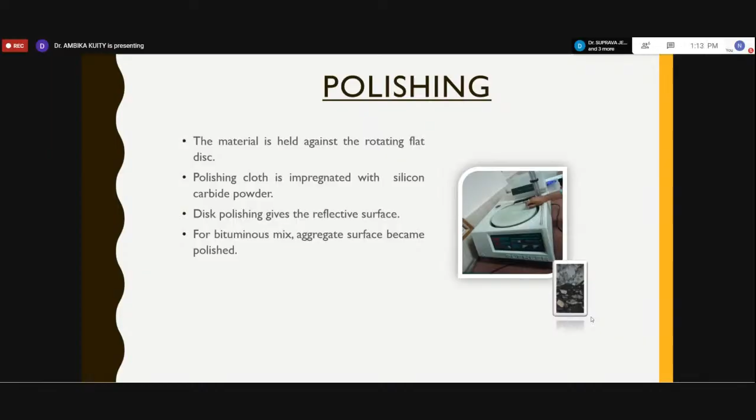If we summarize, for a whole sample we can use it like this. But after preparing all these tiny samples, the process damages the orientation of the particles, because the sample is very small - we will not exactly get what we want to observe. So we would like to increase the number of samples, or increase the size of the sample. So we use the 25 core cutter and increase the size from 1 millimeter to 25 millimeter sample.

So that sample we can directly load, instead of 8 we may load 2 samples within the SEM chamber, and there we can get images of the aggregates, and between the aggregates how these filler particles are situated. Here are some images showing the surface of the aggregate as initially prepared, though the grinding may not be perfectly clear - but you can see how clear these images are that we get from the SEM.

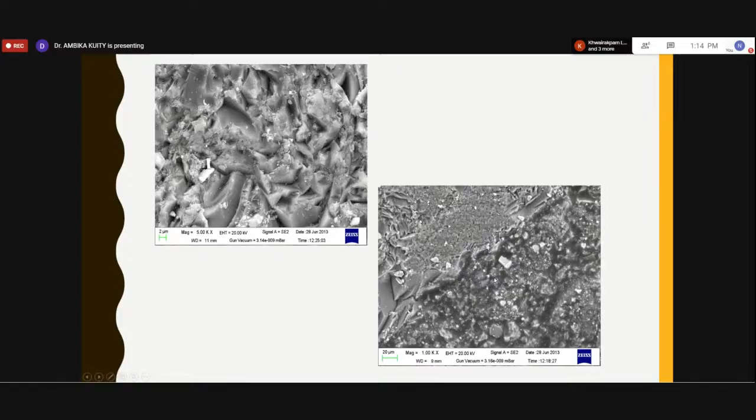Here are images of the bitumen filled with filler particles. If we go closer, we can see how these filler particles are floating within the asphalt binder. These are the filler particles, very tiny particles, almost 4 microns in size, floated within the binder.

Now coming to the analysis part, once we get this kind of images, we have to apply thresholding to find these features, and we observe that this kind of images gives us the area occupancy of the filler particles - the fine particles, or fillers, that we are considering.

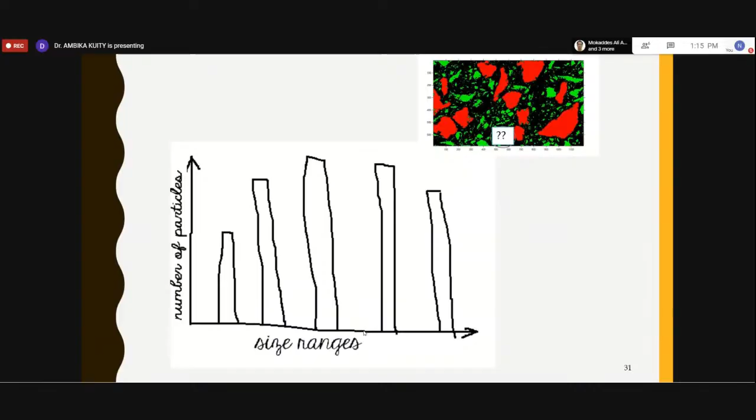But now the question may arise - if whatever we are getting is very irregular in nature, how do we quantify that? In which size range do we place these in terms of sieve sizes? That's what we'll discuss now - how we can quantify this.

Let's say we assume these are irregular sized aggregates, and we must convert them into equivalent sieve sizes of aggregate. From the image we get the area, and from there, how we get the weight. So we have the equivalent area, equivalent radius, and from there we can get the volume.

After getting the volume, how do we get the weight? Obviously, we know the specific gravity of the filler. So by multiplying the specific gravity with the volume, we get back the weight of the filler particles.

Also, the stereological principle states that several 2D images, from where we get the area fraction, will give us the equivalent of 3D images of the sample. So area fraction will be equivalent to volume fraction, as per the stereological principle. We considered that principle here because we cannot go for 3D imaging, so we have to rely on 2D images.

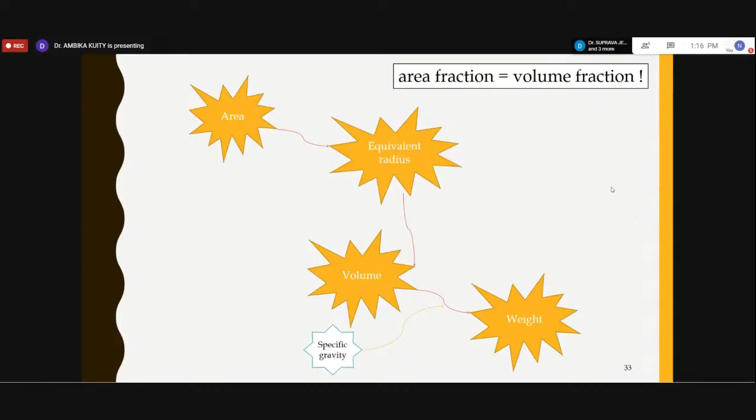So here, another question may arise regarding waste material. Obviously, we are using different types of waste material, but these waste materials have different surface charges - it could be limestone dust, rhyolite dust, or our conventional stone dust, which is neutral in nature. So different types of surface charge nature filler particles are there.

So is there any effect of these particles on the distribution of filler particles within the asphalt? Are they homogeneously distributed or not? That is another question we have to answer.

For that, we used larger sizes of aggregate, because we wanted to observe locations A and B - A being very close to the larger aggregate. Since our bitumen has a negative surface charge, if we use different positive surface particles with the coarser aggregate having different surface charge, we wanted to see what effect this would have.

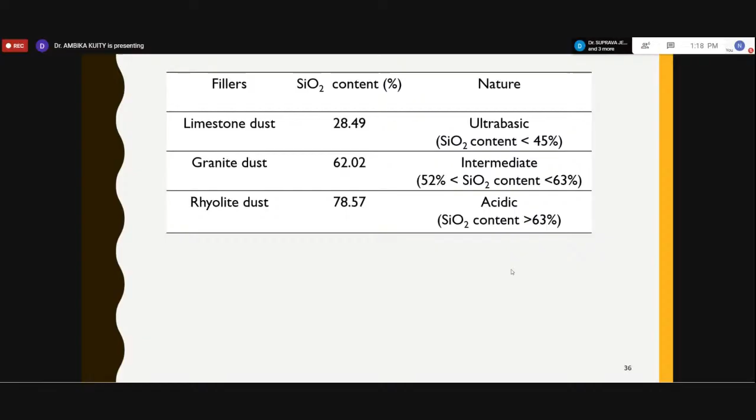Further, we did an XRF study - X-ray fluorescence test - and based on the silica content, we determined the exact nature of the limestone dust, granite dust, and rhyolite dust used in our study. We found granite dust to be neutral, limestone dust to be positively charged, and rhyolite dust to be negatively charged. These particles were mixed to prepare the asphalt mix sample, while keeping other aggregates as limestone aggregate.

But still, we have to justify that what we are looking at under this SEM are the filler particles. So for that, we go for the hydrometer study, and then we compare whatever we are getting from the images in terms of the volume, and it shows that the corresponding results are very good and well matched. So from there, we say that, yeah, these are indeed the filler particles. These are not the ripples coming from the images.

So another method we have to use is the area coverage method to justify whether these are actually homogeneously distributed or not. So first, at the different positions for different fillers, we have found out the area coverage. It is always observed that for the limestone dust, granite dust, and rhyolite dust, with different sizes, the area occupancy value is different.

Area occupancy is described as the filler particles which are present with respect to the whole image area captured through that SEM. So this area occupancy is different due to the density nature. While the density is different, the quantity we have used is different. We have used it by weight here, so it shows that a different quantity is there. So irrespective of the position, that value is almost the same.

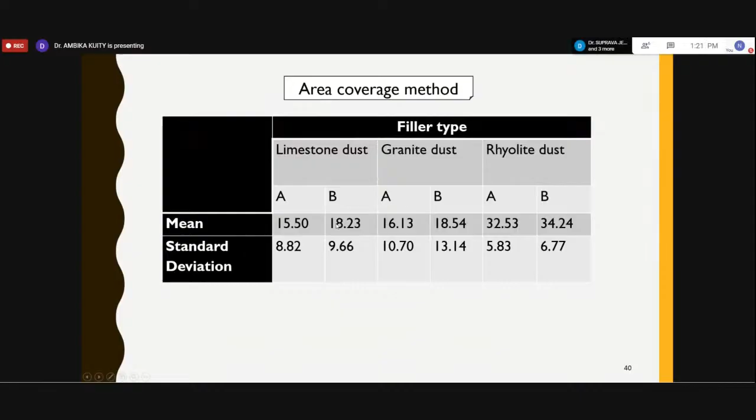Then the next method is the weighted centroid method. This is a very common method to find out the homogeneity of any material. So here also we have used it, to see how these smaller, tiny particles are distributed within the material. This is just for observation of what we did for the whole image section. And then we superimposed the locations of the weighted centroids we are getting for different images, corresponding to its center.

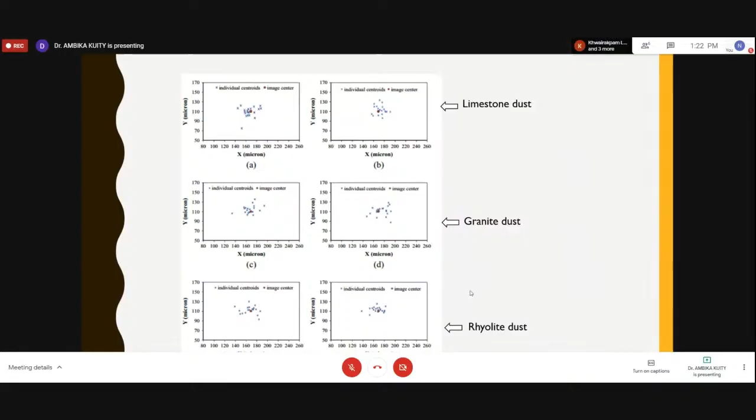But that also we have to prove with our statistical study. Hypothesis one says that we have to search whether there is any difference in the eccentricity of the overall centroid between location A and location B for a given type of filler. And hypothesis two says that there is no difference in eccentricity of the overall centroid for one type of filler with another type of filler for a given location. That is, for a particular location we are going to study.

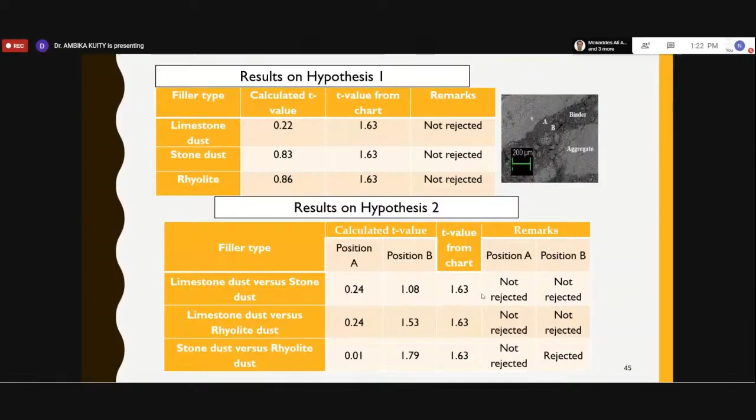And these results also show that there is not much difference corresponding to the position. So our null hypothesis is not rejected. So ultimately, we must say that yes, the surface charge has no effect on the distribution of the particles. So the particles we used in our limited study are homogeneously distributed.

So after that, we would like to find out, after they are homogeneously distributed, how these filler particles affect the optimum strength if we go for certain mechanical property tests. So here we are using fly ash, brick dust, and conventional material such as stone dust. We kept all the components, the aggregates, fixed, other than the filler quantity. And this filler quantity we are varying from 6% to 12% to have a look at how these graphs change.

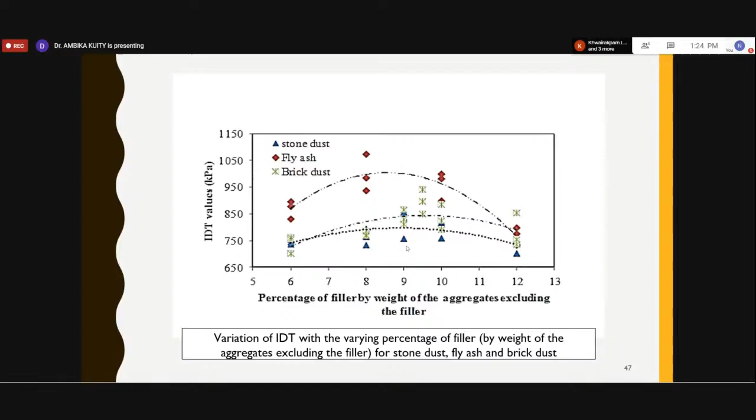So here also we are observing that for the stone dust, fly ash and brick dust, interestingly we observed that at this optimum filler content, whatever we are getting, that is the optimum IDT value and mechanical properties. If we capture the images, it will interestingly show that the area occupancy at that value of the filler content, for different filler content, will be the same.

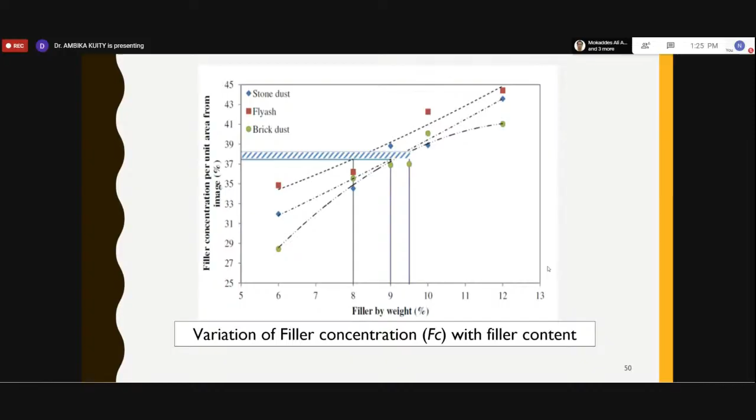So we also have to statistically prove that across different types of fillers, this area occupancy value is the same for all the values we are getting. So here also we proposed one null hypothesis that for each pair of fillers, the average value of the corresponding area occupancy corresponding to their respective maximum IDT values are statistically same. So here also we did our t-distribution test and we found that the null hypothesis is accepted. So corresponding to the different filler content, the area occupancy value will be almost the same.

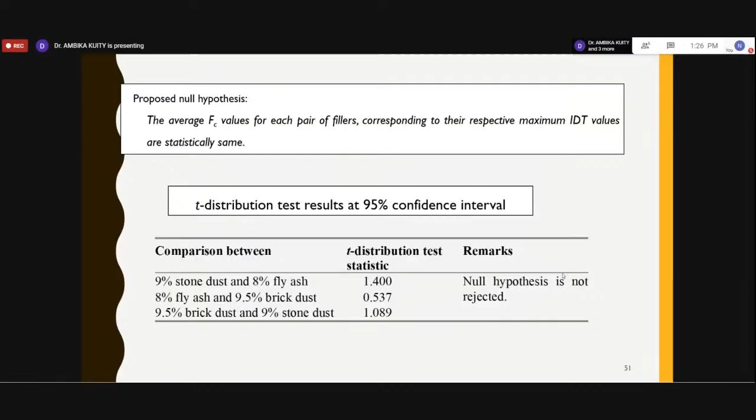So in this way, we can quantify the filler quantity through the microscopic study. Again, the question may arise: is there any other way we can explore to find out the optimum quantity while using different types of waste materials? This research is very much an open floor, so anyone can explore any other method to optimize the filler content.